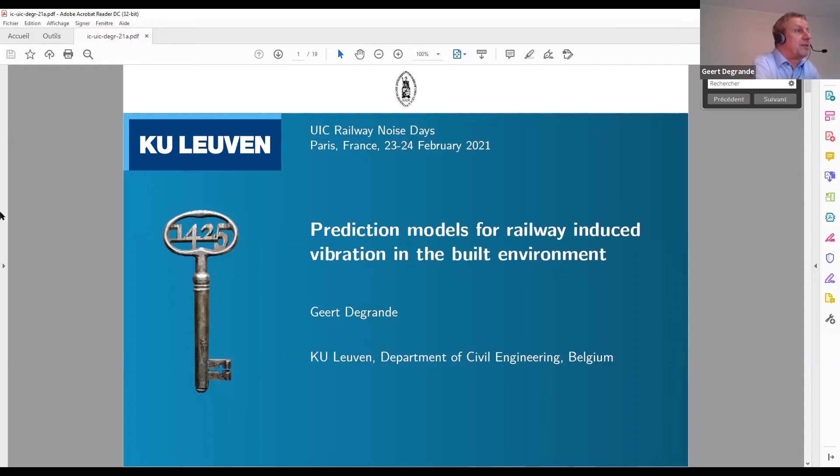Okay, thank you, Pierre-Etienne. So the title of my presentation will be on prediction models for railway-induced vibration in the built environment. Next, please. So the next slide, in fact, points out that we have many challenges to cope with when doing predictions, since we're dealing with coupled problems, both at the source, that could be a track at grade or track in tunnel, as well as at the building site where potentially vibration and noise are experienced.

Vibration is propagating through layered soils. We have to deal with moving quasi-static as well as dynamic axle loads, and to take into account multiple excitation mechanisms such as wheel and rail unevenness, rail joints, and parametric excitation. And this needs to be done in a much wider frequency range than we're used to, for example, in earthquake engineering, since we cover frequencies up to 80 Hertz and potentially up to 250 Hertz for noise.

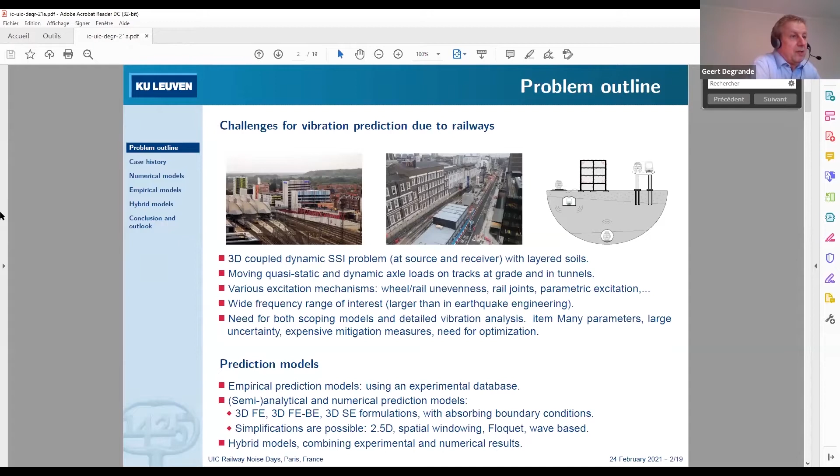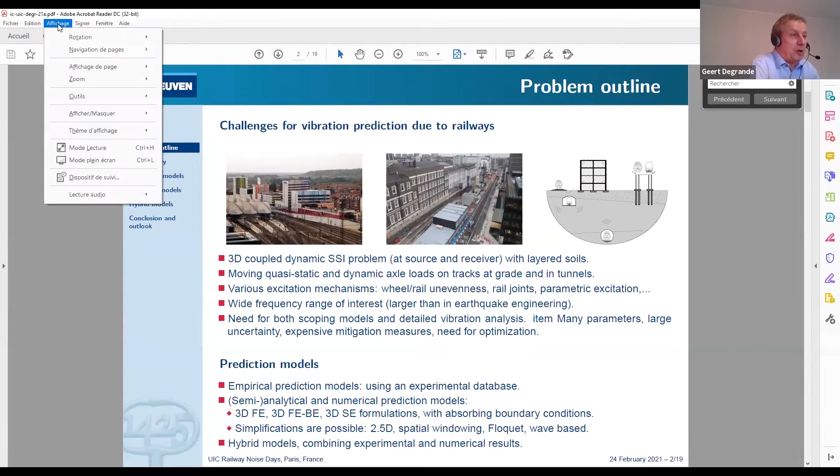In practice, there is a general need for detailed vibration analysis, but also for scoping models that are quick to run in early design phase. And what we see happening also in practice is that there is a need to do parametric studies to deal with uncertainty. We see that mitigation measures could be expensive, so there is a general need to optimize them. So in my talk, I will explain where we are with respect to numerical modeling, and also link up with empirical models that are frequently used in practice, to end up with a proposal to develop hybrid models as we aim to do in the SILVARSTAR project.

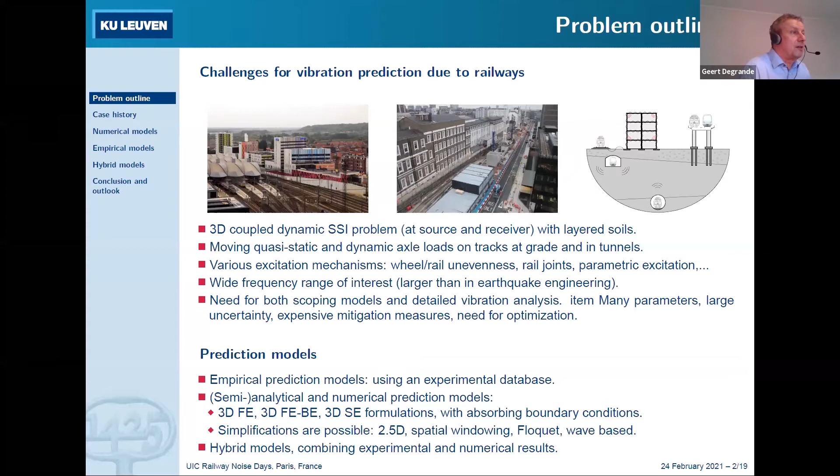Next slide, please. So in order to illustrate the state of the art on modeling, I will make use of a case history where a couple of years ago in Leuven, we did extensive measurements along a conventional ballast track on embankment, which is close to a building you can see on the right top, an administrative building with a repetitive structure in reinforced concrete and infill masonry. That building is located at about 30 meters from the railway track, which is operated by commuter trains as well as freight trains. Next slide, please.

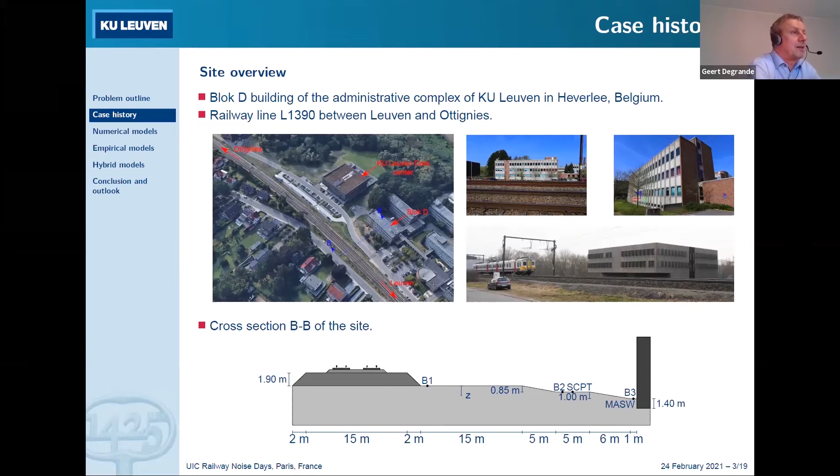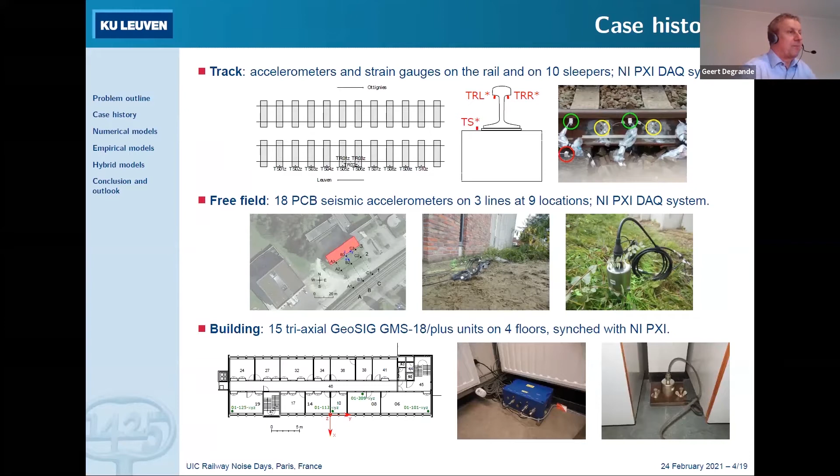We set up a very extensive measurement campaign where we had accelerometers attached to 10 sleepers, and also to the rails. We put strain gauges on the rail web. In the free field, on 3 parallel measurement lines, we installed 18 seismic accelerometers. And on the 4 stories of the building, we had 15 triaxial wireless GeoSIG sensors. Measurements were performed in 2 ways. First, we recorded train passages over 1 week, day and night, both commuter and freight trains. And second, we measured transfer functions from track to free field into the building using multiple excitation points along the track. Next slide, please.

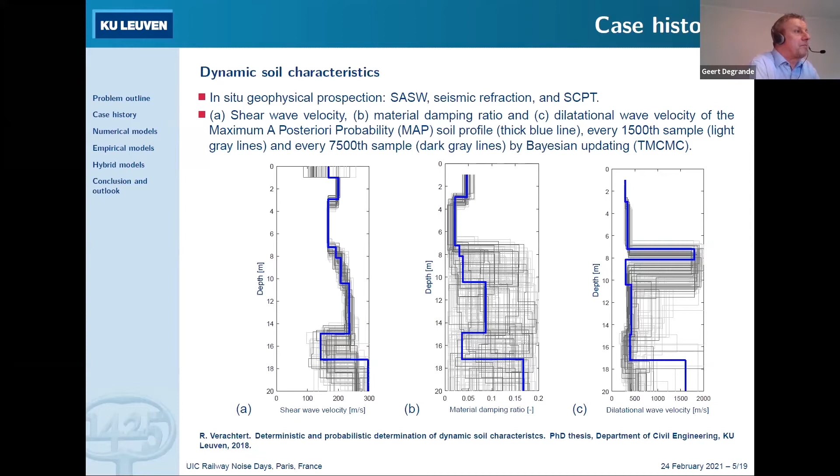And a similar conclusion can be drawn with respect to the P-wave velocity, which is shown on the right. However, there the uncertainty at depths greater than 7 meters is not so high, as we know that the groundwater table is present there. So a good estimate of the P-wave velocity would be in the order of 1600 meters per second. But this already points out that in this type of prediction models, we will have to cope with uncertainty. Next, please.

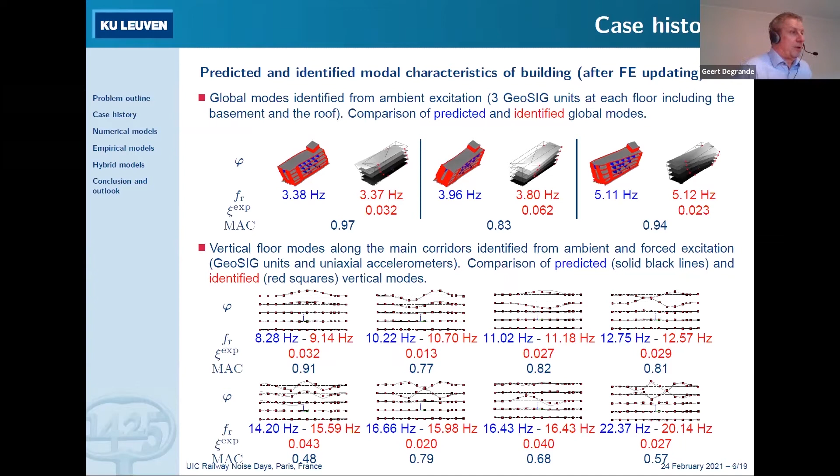When it now comes to making predictions, what is usually done today is to make computations in 2 steps, where it is assumed that the dynamic axle loads on a track or in a tunnel track will not be much influenced by the proximity of nearby buildings. So a 2-step scheme is set up, where in a first step, the free field response is evaluated. So we would call that the incident wave field.

And this in turn is also done in 2 steps. So first, a track-soil interaction problem is solved to compute the dynamic axle loads, as I will show next. And subsequently, the dynamic axle loads are applied to the track to obtain the free field response.

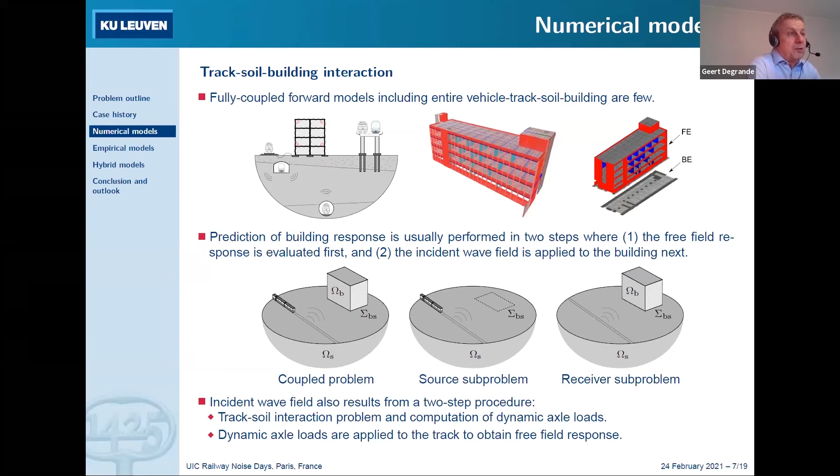In a next step, so in the final step, that incident wave field would be applied to a building, as you can see on the top right, where you see the finite element model we used for that building, which is coupled to the soil by means of a boundary element model of the foundation and the subsoil layers. This is done in a next step and is quite similar to what we usually do in earthquake engineering. Next, please.

So first, the transfer functions from track to free field. We use several models first to calibrate the properties of the ballast, the embankment, and the topsoil layer. We did not solve an optimization problem, as the models we are running are a bit too expensive to be used in an iterative scheme. And this is certainly an aspect that could be addressed in the future.

In order to compute the transfer functions between track and free field, we use a model that is depicted in the middle, where we in fact model a cross section with finite elements and boundary elements. So the mesh is 2D.

However, the computation is 3-dimensional, since we take into account the different waves that can propagate in the direction of the horizontal plane. I won't go into the mathematical detail, but this is a convenient way to compute waves radiated from railway tracks and to compute transfer functions. And we have a suite of tools available, which are called Traffic, BEMFUN, and Wavefem, to accomplish this task.

At the bottom, you see results of predicted transfer functions between track and free field on the central measurement line we install between the track and the building. So these are the receivers B1, B2, and B3. The black solid line shows the prediction using the average estimated soil profile. The gray shaded area shows the 90% confidence interval on our prediction using 20 of the possible identified soil profiles.

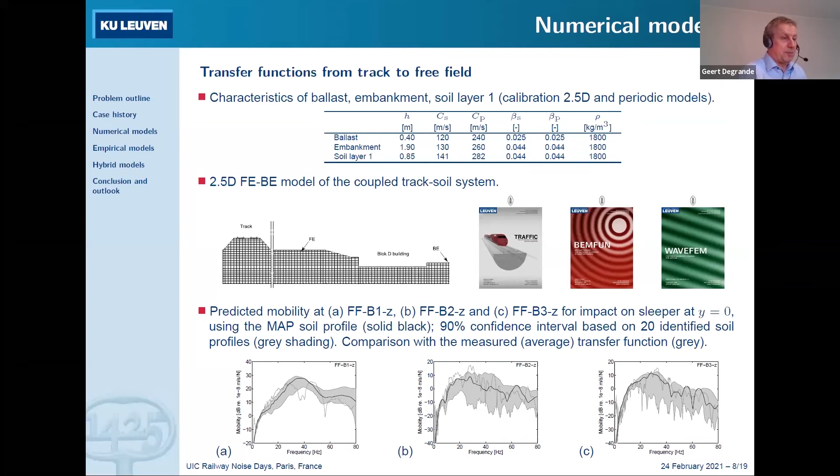So they show already an indication of the uncertainty we have on our model prediction in terms of transfer function. And we see typically that uncertainty raises with frequency and also with distance to the track. The light shaded gray line on the graph is the average measurement result of our transfer function. And we see that sometimes that result is outside the bounds of our prediction, which means that there is still some model and parameter uncertainty involved in our prediction.

Next, please. In a subsequent step, so now that we have transfer functions, we also need to compute the axle loads. This is typically done by using the compliance of the track, the compliance of the vehicle, and using as input the unevenness of the track. So in this particular case, we made a vehicle model of this Siemens Desiro train by using a multi-mass rigid body model, as you see on the right.

Infrabel could give us power spectral densities of unevenness measured on this track. And using these, so using the information we have on the track as well as the vehicle and the unevenness, we can make predictions of time histories and frequency spectra of these dynamic axle loads, as you see on the bottom figure. Next, please.

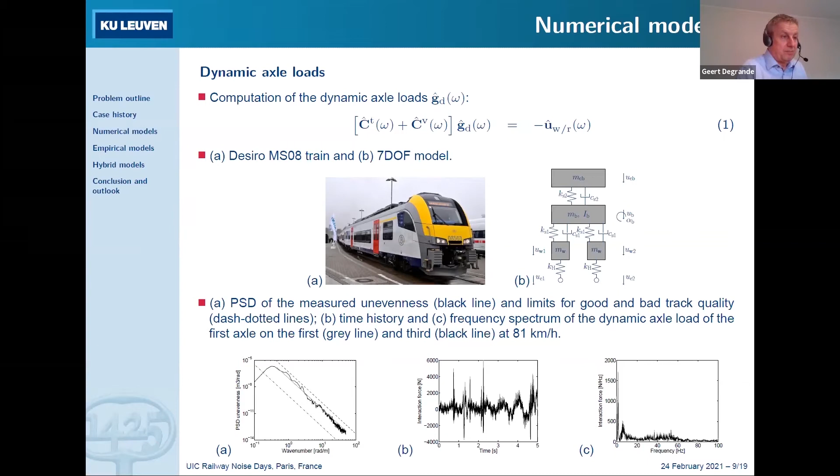So with the transfer functions available, as well as the dynamic axle loads estimations, we can make prediction of free field response. And I again show these on the central measurement line between track and building at the distances B1, B2, and B3. So B1 is next to the track and B3 is next to the building. On top, you see the comparison in black of the predicted response using the MAP soil profile, while in gray line, you see the measured response. And you see that, well, in amplitudes, we're not far away.

On the bottom slides, I show similar results, but now presented as 1/3 octave band spectra. Please mind that the vertical scales all cover 60 dB. However, the ranges are different. So the first graph is from 20 to 80. The second is from 10 to 70. Again, the black line shows the prediction of the free field response during the passage of a train using the average estimated soil profile. The gray light line shows the measurement results.

And then we made alternative predictions taking several soil profiles that were, well, equally valid, let's say. So soil profile 1 would be a bit softer. Soil profile 6 in red would be a bit more stiff. And we see that this uncertainty on the soil properties results in some deviation in prediction on the vibration levels.

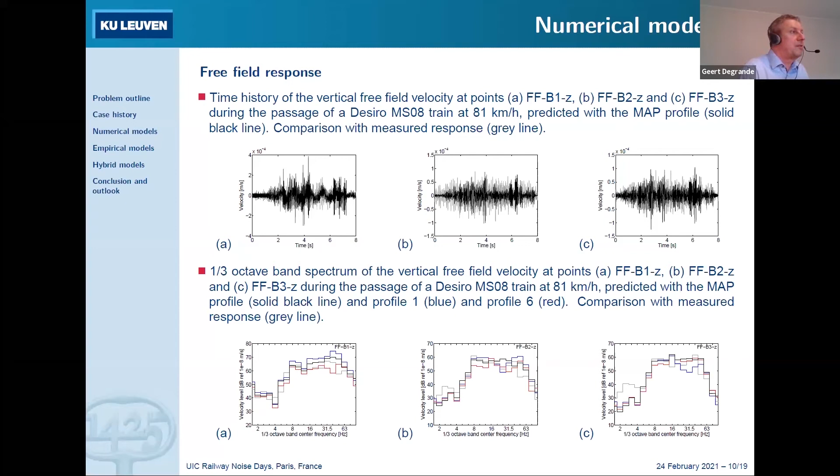Next, please. So we continued that exercise to make prediction in the building for a train passage. And on the right, you see here our prediction in the basement, on the ground floor, first floor, and second floor of the buildings. That's from A to D with the similar color codes as on the previous slides.

And we come to similar conclusions that despite all efforts we have taken to determine track unevenness, vehicle properties, soil properties, and building properties, the prediction is relatively good from frequencies, let's say, from 8 to 16 hertz, except in the very low frequencies. Now, this makes us conclude that we can do a relatively good prediction. However, the effort needed to determine parameters is substantial.

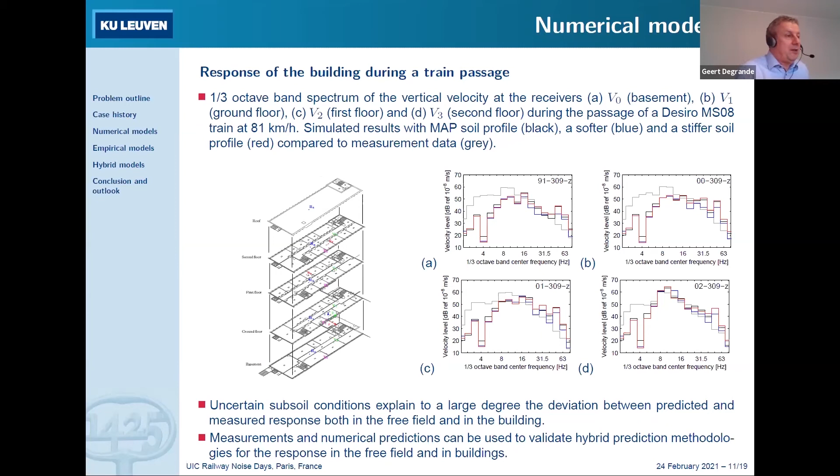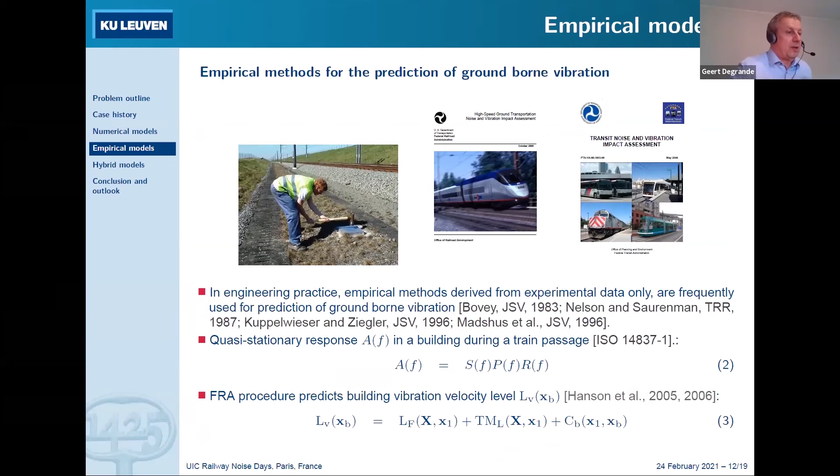And so we believe that we can find inspiration in procedures that are often used in practice, like proposed in the ISO 14837 or in the FRA procedures, where the vibration level, as you can see on the bottom, is predicted as the superposition of a force density, a line transfer mobility, and a correction term from the building.

So that line transfer mobility would be determined by making a superposition of different point source transfer mobilities. The force density would be computed indirectly by making the difference between a vibration velocity level and a line transfer mobility. And the receiver term would be a correction term taking into consideration soil structure interaction, attenuation over the height of the building, and floor resonance frequencies.

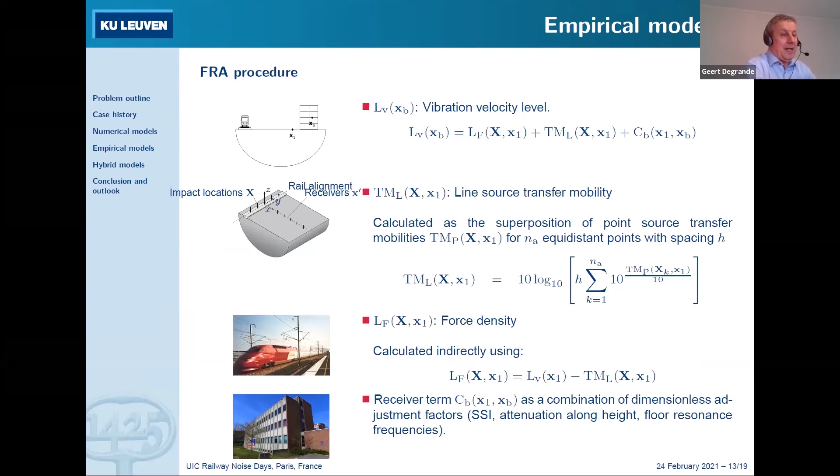So what we believe is that if we look at the pros and cons of the numerical models and the empirical models, we could try to find a way to use best of both worlds. So to combine the flexibility of numerical models to account for a wide range of parameters with the advantage of empirical models as they are able to account for local train, track, and soil properties.

And to come up with a hybrid model that, for example, could be used when new railways are constructed in proximity of existing buildings, where you could use numerical prediction of force density combined with experimental values of line transfer mobilities and building response measured on site, or vice versa when you construct new buildings in proximity of existing railways.

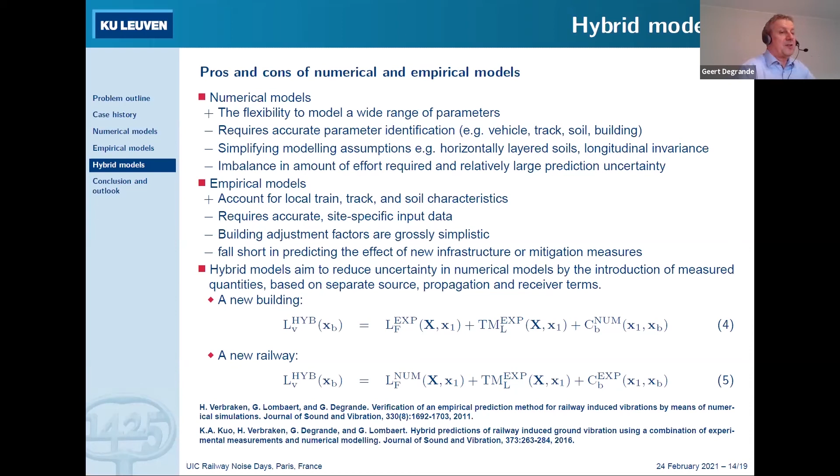This is exactly what we aim to do in the SILVARSTAR project. So within the frame of this project, which runs since November 2020 over a period of 2 years, and which is supported by Shift2Rail, we will develop such a hybrid prediction model together with Vibratec, who is the project manager, Wölfel, Southampton University, EMPA, and UNIFE, and this in close collaboration with FINE2.

So the aims of that project will be to develop such a hybrid methodology that would enable transposition of vibration emission data from one situation to another, making the distinction between source, propagation, and receiver, to also define and validate a track-independent vehicle indicator, and to implement this methodology in a user-friendly software that would be equipped with a graphical user interface and will also interface with geographical information systems.

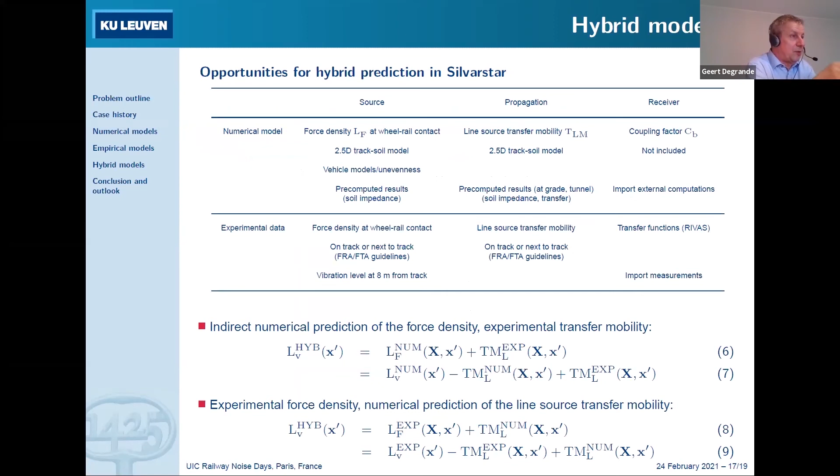Well, we have been thinking about different possibilities to combine numerical prediction with experimental data. I have no time to go into this detail right now, so I will skip to the next slide, please.

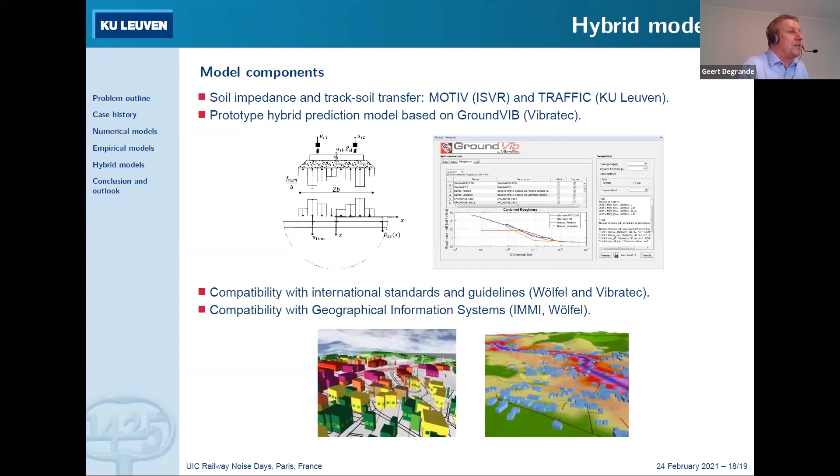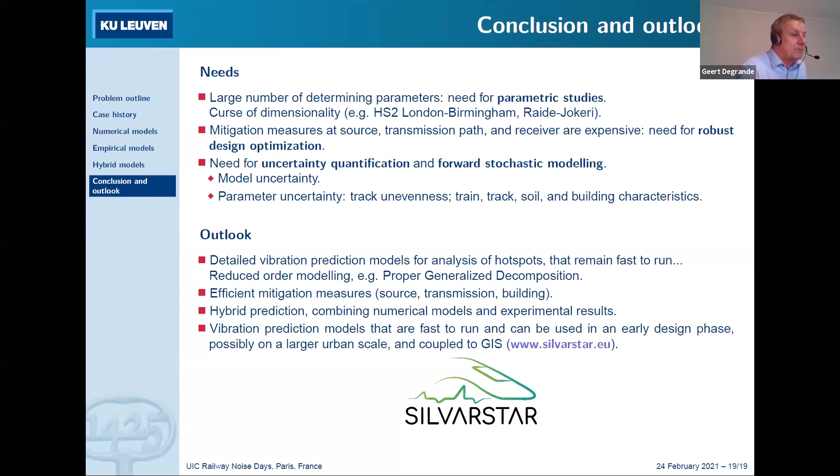Thank you very much. Thank you, Geert, for this impressive tour into modeling, and also how you can come to some industrial products and software with the cooperation of partners. And I think this is something which is quite interesting to note, that nowadays we really need some cooperation between universities, engineering companies, and railway companies in order to come to feasible results, even in terms of modeling and understanding phenomena. But that's not new at the end of the day.